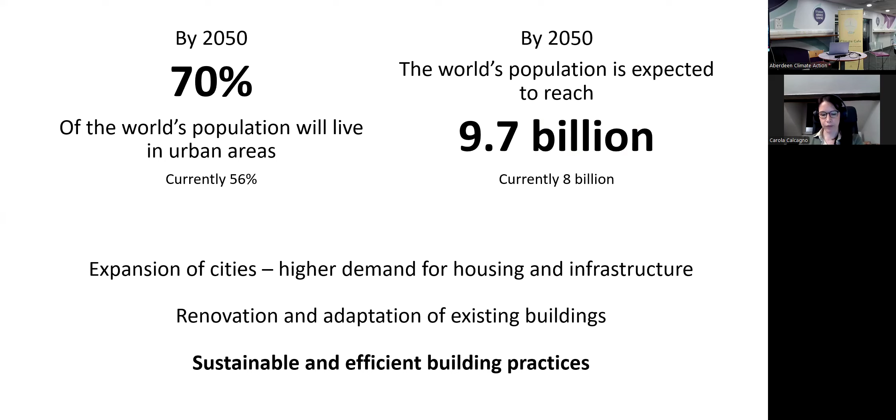So by 2050, the global population is expected to grow by around 20%, reaching 9.7 billion people, with about 70% of us living in urban areas. This means cities will keep expanding, more housing, more infrastructure, and the existing building stock will need to be renovated and adapted. All of this calls for sustainable and efficient building practices that help us meet the targets on time and deliver long-lasting performance. At the moment, the built environment accounts for around 42% of total global annual CO2 emissions.

About 27% comes from building operation. That means energy used for, for example, heating, cooling, lighting, and so on. The remaining 15% comes mainly from the concrete and metal industries, whose impact becomes even more important as operational emissions drop thanks to the new technologies. I've seen you have a talk about heat pumps, for example. So this really highlights the importance of tackling the issue from the material side of the industry.

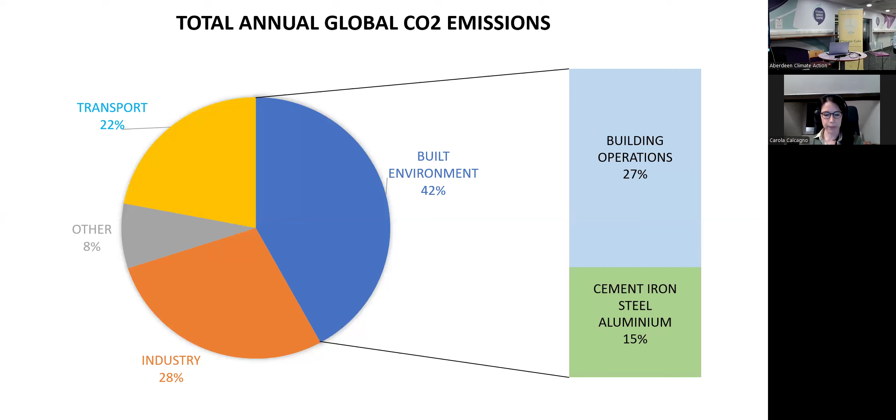So this infographic here shows the approximate amount of embodied carbon per kilo for the most commonly used building materials. Embodied carbon refers to all greenhouse gas emissions which are released during the production, transport, construction, and the eventual disposal of materials. So as you can see, metals have a high impact, mostly because of the high temperatures and energy needed for their production. Concrete has a smaller impact per kilogram, but it's used in huge quantities, so overall, its total emissions are very significant.

Other materials like plastic, glass, and brick have relatively high impact per kilo, but they are used in smaller amounts overall. And then there is timber, which stands out with a negative embodied carbon value, thanks to its ability to absorb CO2 from the atmosphere and store it. Overall, the emissions from harvesting, transporting, and processing timber are offset by the carbon absorbed during its growth, as we know, with photosynthesis. Plus, timber manufacturing uses far less energy compared to other materials.

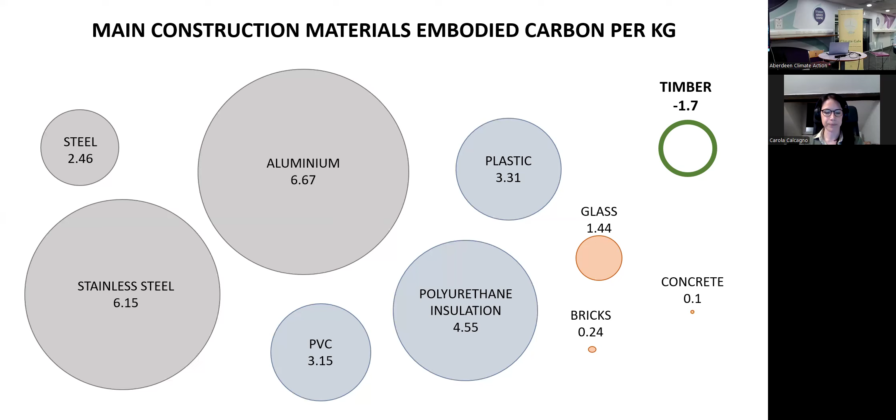Here is shown a focus on the UK, showing the most commonly used building materials. And as you can see, concrete is by far the most used. So even though, as we've seen before, its impact per kilo is smaller than metals, for example, its sheer volume makes it a major contributor. And you can also see that timber already makes a positive impact on embodied carbon overall, even though it's used in smaller amounts. So why not use it more?

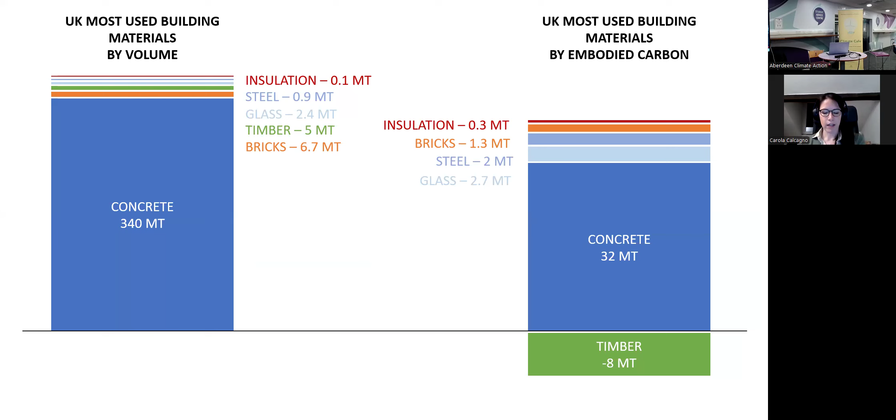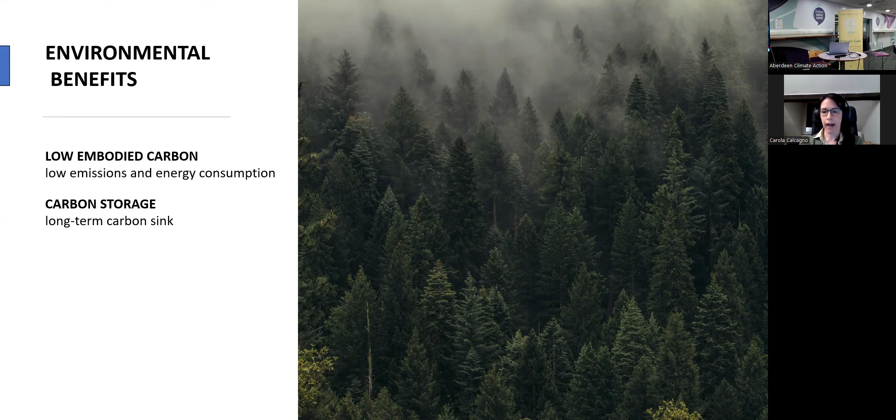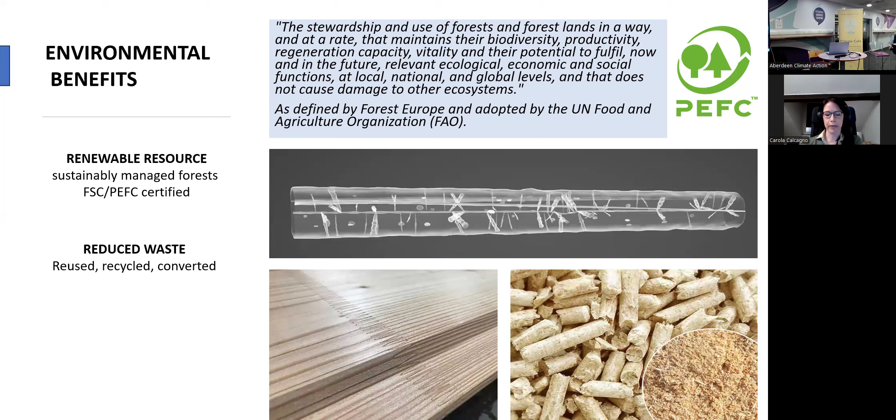Timber manufacturing also produces very little waste, and new technologies are helping us to make the most of every log. For example, in our factory in Methven, we have the largest finger jointing machine in the UK, which allows us to remove defects and rejoin pieces into longer sections, minimizing waste. And even the waste that is produced, like sawdust, for example, can be repurposed to make products such as pellets.

Moving on to the performance benefits, one of timber's greatest strengths is its high strength-to-weight ratio. So it's light, but it's strong, which means easier transportation, less need for heavy foundations, and therefore less concrete, and the possibility to build upwards on existing structures. And in light of what we've seen at the beginning, that's a great advantage for urban expansion and regeneration. The example here is a building in Australia where 10 additional floors were added on top using CLT. So in the image here the gray part is the existing building, and the 10 floors on top in white are the CLT structure. So basically a new building on top of an existing one.

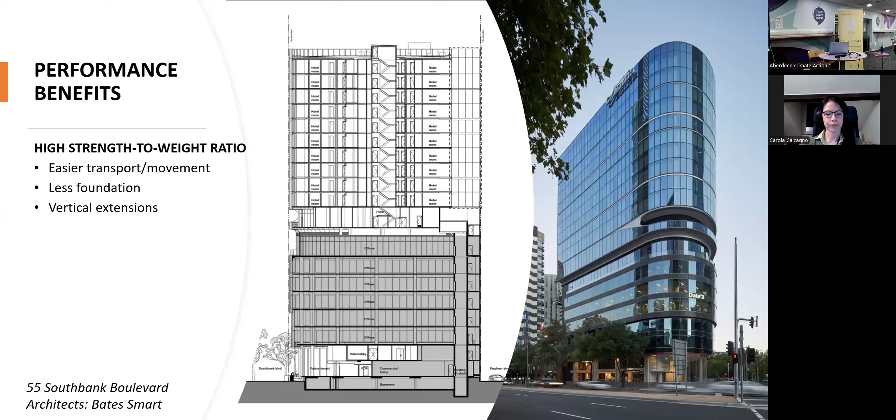Timber also lends itself well to prefabrication, offering high precision and design flexibility. This means quicker assembly and the ability to build in tight spaces. This example is from Portobello in Edinburgh, where this 3-story CLT structure was built on a brownfield site in between buildings. So prefabrication ensured precise measurements and minimal time on site, which was crucial in a busy urban area.

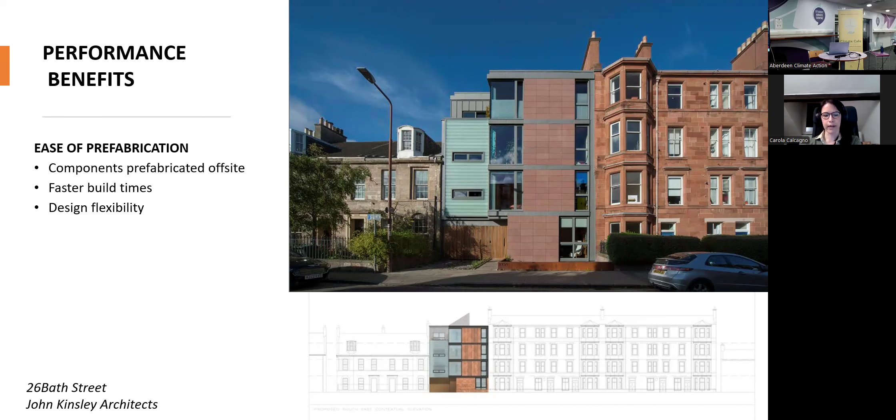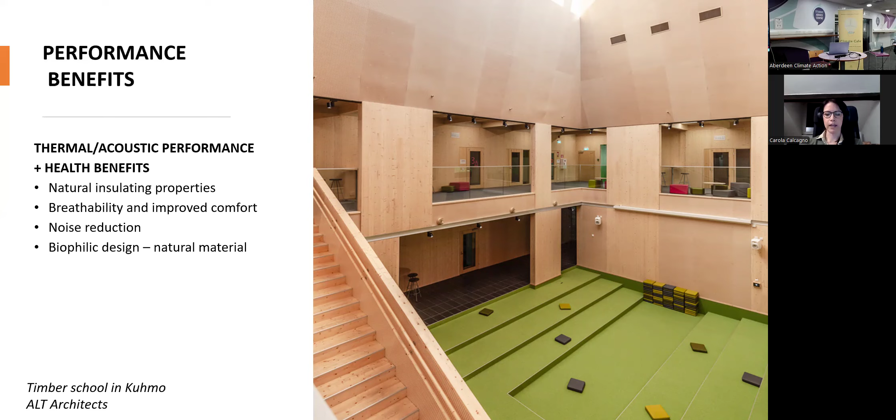Last but not least, timber's natural qualities make it great for comfort and well-being. It breathes, helping regulate humidity and indoor climate. It reduces noise and is naturally insulating. Studies have also shown that being around timber can have positive effects on heart rate and blood pressure. This is why it's increasingly used in schools, and it feels a bit like being in a wood.

All the benefits I've mentioned before, of course, also have an impact on the economy and have economic advantages. So shorter construction times, smaller foundations, so less material and less concrete. And it's easier to comply with the increasingly strict sustainability standards.

Of course, another benefit that I forgot about is the variety of products. So timber can be used in its solid form. There are a variety of species, but it can also be used as engineered timber products. So for example, glulam, which allows us to reach longer spans and bigger sections than solid timber, and CLT, which we can find in the form of panels. And there are also a variety of thermally modified timbers that enhance the performance of this material.

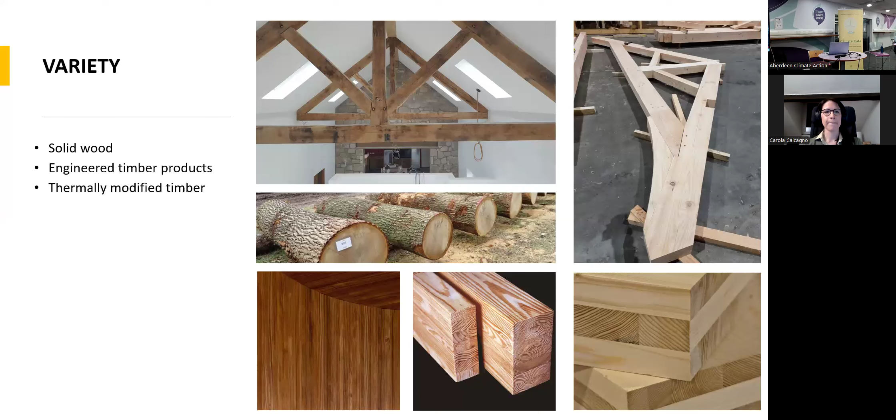Of course, timber also has its challenges, just like any other material. Fire safety must be carefully designed for, and Dave will talk to you more about that later. And we also need to detail properly to avoid moisture entrapment, since water for the building can be as damaging as fire. Finally, because it's a natural material, every piece of timber is unique, which is wonderful aesthetically, but can present some challenges from an engineering point of view.

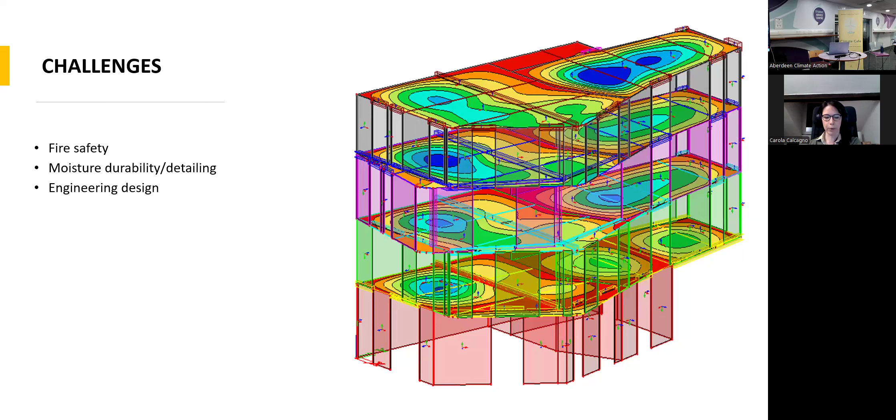To wrap up, timber offers a genuinely sustainable, efficient, and versatile solution for the future of construction. It helps us cut carbon emissions, supports healthier living spaces, and allows us to build faster and smarter, all while keeping an eye on environmental responsibility. Of course, no material is perfect, but with good design, proper detailing and responsible sourcing, timber can play a major role in shaping the cities of tomorrow.